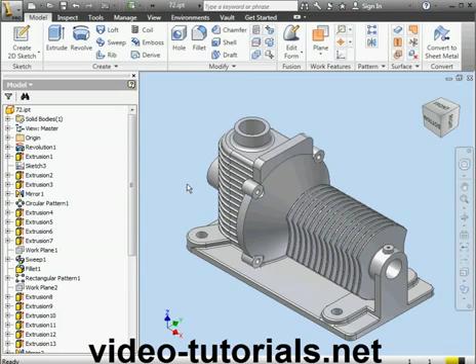Let's begin by activating the Split tool. Let's select the Split Solid option. Now we set the Split tool. I'll use the YZ plane and click OK. In the Solid Bodies folder, we can see that we've got two solids now.

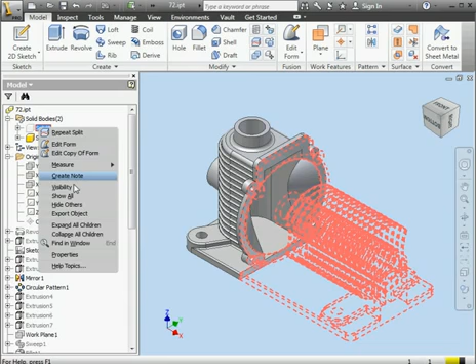Here we might be a bit ahead of ourselves actually, since we haven't yet studied assembly, so I'm going to give you an overview of how, from this point, we can create an assembly. Let's begin by right-clicking on Solid 2. Here's the Export Object option. If you don't export the solid now, Inventor's just going to prompt us later on. So let's not export the object right now.

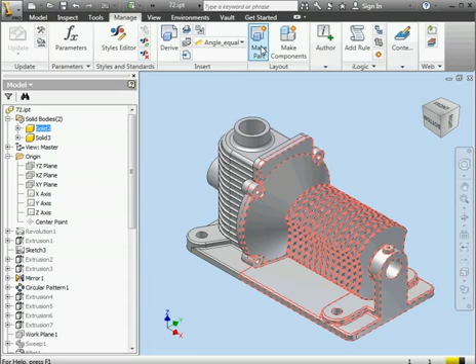Okay, let's go to the Manage tab. Click on Make Part. And lo and behold, here's the prompt I was just talking about. Let's click OK. The Make Part dialog window opens. Now, since we selected the solid previously, it's already pre-selected here for us. To unselect it, you can just click the plus sign. Here's the export prompt again. Let's just click OK.

At this point, we specify the part name. I'm going to call it 72-1. Down below, we can place the part in a target assembly. For more information about the Make Part routine, do take a look at our Inventor Assembly course, Lesson 25. At this point, I'm going to click OK.

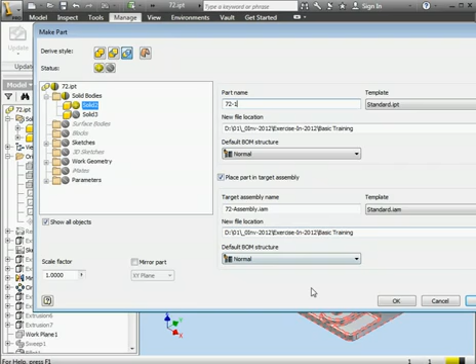Now we're in the assembly environment. Our part was imported and it was also grounded. That's what's indicated by this pin symbol. When a part is grounded, it means the part can't be moved. However, it's easy to unground a part. Just right-click and scroll down to Grounded. Now I can move my part freely.

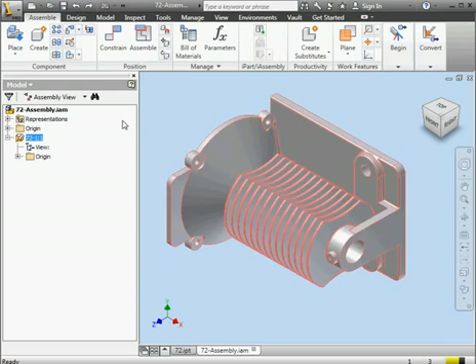Let's ground the part again. Right-click, Grounded. Now when I try to grab and drag the part around, I can't. The grounding symbol, the pin, appears next to my cursor. Inventor created this assembly, but it's not yet saved, so let's go ahead and do that. Click OK. And let's go back to our original part.

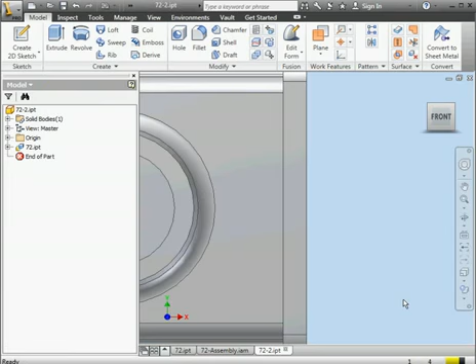Now I'm going to right-click on Solid 3 and select Export Object. Click Make Part. Notice this time Inventor didn't give us the Export Object prompt. And I'll name this part 72-2. For this example, I'm going to uncheck Place Part in Target Assembly. Let's click OK. And here's our second part. Let's save it as well. Click OK.

Notice here we're not able to modify our part. If we need to modify the part, we have to go back to the original part document. Most of my features are currently suppressed in the model browser, except for Split 1, that's unsuppressed. Let's go ahead and suppress Split 1. And now with Split 1 suppressed, the other features are available for editing.

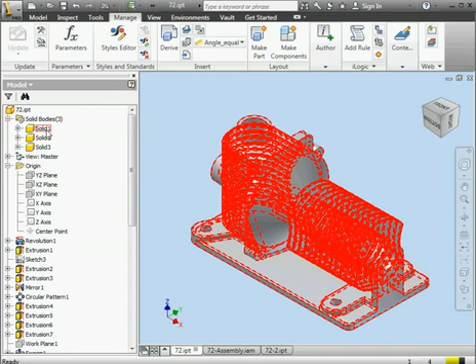Let's take a look at the Solid Bodies folder. We've got 3 solids here now. There's our original solid, and solids 2 and 3 that we created after applying the Split tool. Let's bring back Split 1. We'll scroll down to it, right-click, Unsuppress Features. Okay, now we can make some modifications.

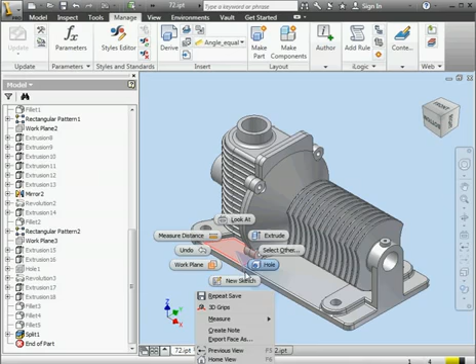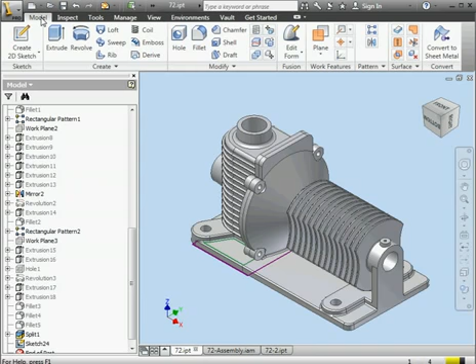Let's right-click, New Sketch. And I'll drop a rectangle about here. Notice my rectangle also covers the back portion of the housing. Let's finish the sketch. Go to the Model tab. Activate the Extrude command. Let's select the profile to extrude. We'll use the Cut option. Change directions. And click OK. Notice that the cut was applied to the front housing only.

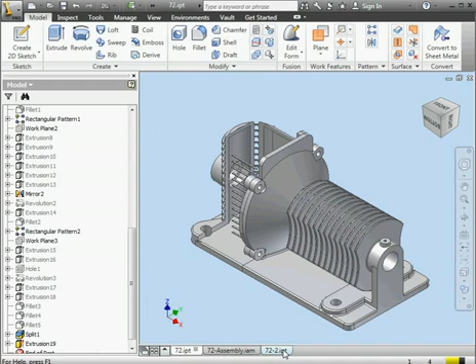Okay, let's go to part 72-2. And let's click Update. Here's the real-time update of our work. And finally, we are now finished this model. This concludes our model of how to create a gear housing.